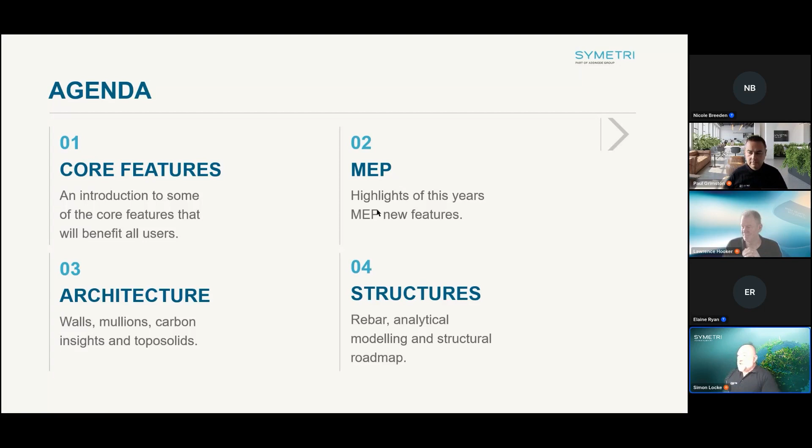In today's agenda, we're going to split it into four areas. We'll look at the core features first, which are hopefully beneficial for every user of Revit. Then we'll take a look at some of the MEP key features this year, followed by architecture with Paul leading that bit, then we'll finish off with structures with Lawrence. I'll be taking us through the first bit, looking at MEP, but first, for those not too familiar with Symetri, we'll go through a brief introduction of who we are and what we do.

Symetri was formed quite a while ago, around about 1989, and it's grown exponentially over the years, mainly through acquisition. We're currently at around 1,000 employees in about 7 countries and 33 offices. Over the years, that size has come from about 23 acquisitions.

Our key catchphrase and the thing we work towards is we challenge people to work smarter for a better future. The four pillars we try to follow: we work with and help people with leading edge, cutting edge technology, both Autodesk and other vendors. We help our customers through our knowledge and expertise, so consultancy, training, etc. And we become a trusted partner through the advice we give, looking at software, training, hardware, etc. Which all ends up with people working smarter, us as well.

The kind of work we do, obviously we work with different people - manufacturers on the MFG side, contractors, designers, consultants, and end clients, owner operators, etc. As mentioned, we work on training, support, consulting, but we also provide IT solutions, so hardware, software, antivirus, design software, etc. And we also have people embedded on long-term project delivery, both BIM consultancy, design work, drafting, etc. Currently we're the number one Autodesk solution provider globally.

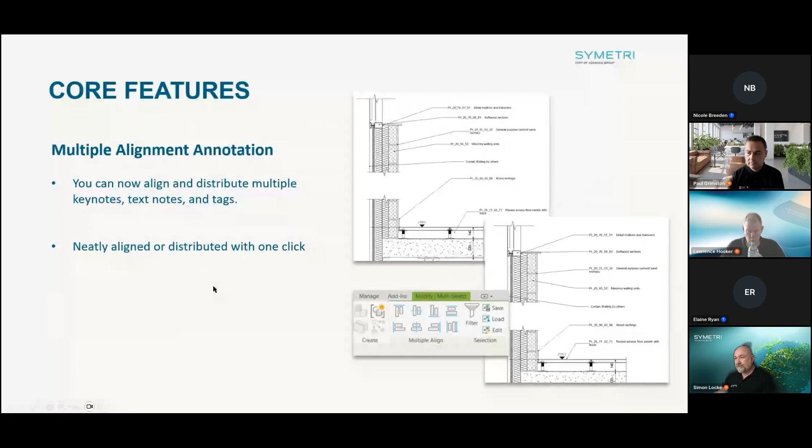The next one's quite a good one, which is, it's not such a visual one unfortunately, but it's background export to PDF. So once you send your PDFs out for export, you can now get an option at the bottom of the dialog box which allows you to export in background, which is then going to allow you to continue working on your project while this is happening, while it's all processing in the background. So it should be a good time saver, that one.

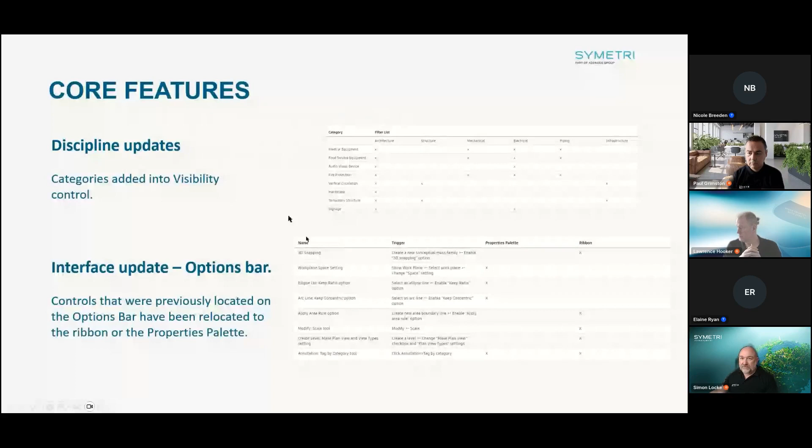The next one, again, is another quite handy one, especially for the management side. This will allow you to create export mapping for IFC. So you can basically save IFC mapping templates out of the project, and you can actually save them within and import them into new projects as well. So it allows you to standardize your IFC mapping. You can give it to other project people and share it amongst the team. So it's a handy feature.

The next one to look at is the import and export ability of step files. So this will allow you to bring in things like 3D manufacturing data from likes of Fusion 360 without having to convert it to DWG, etc. So it allows you to import and export the step file from Revit, so you can coordinate and collaborate better with our partners within the manufacturing space.

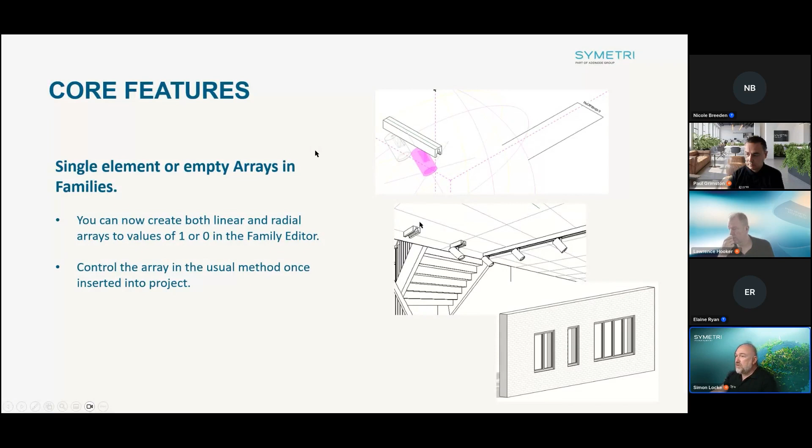So that's some of the highlights of the core features so far. I'm going to move just briefly into the MEP area, which is the area I sort of cover.

So it allows you to then look at your numbering down the line, because quite often you'll delete things, you'll add things in, you move things around, and then the numbering kind of goes out of sync. So it allows you to then consider the numbering a bit later on down the line using something like either manual input, or if you've got an automated numbering system like Navigate or something like that, you can then do the numbering then.

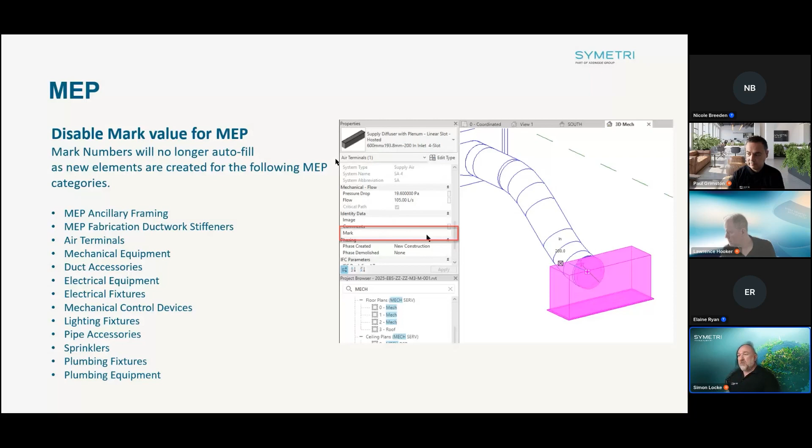The following has added a couple of additional MEP parameters. The first is the maximum amount of circuits for data panels. This has already been available for power panels for quite a while, but now you're able to maximize the value for data panels and fire protection panels, etc. So for things like a data switch, you can set 10 outputs, etc., rather than just having an unlimited amount.

The other one for the fabrication guys is they've added material gauge into there. This will be set within the fabrication database, so it is a read-only parameter, but it will come through now into the properties palette, so you can use it within the Revit project. There might be some more additional ones coming throughout the year.

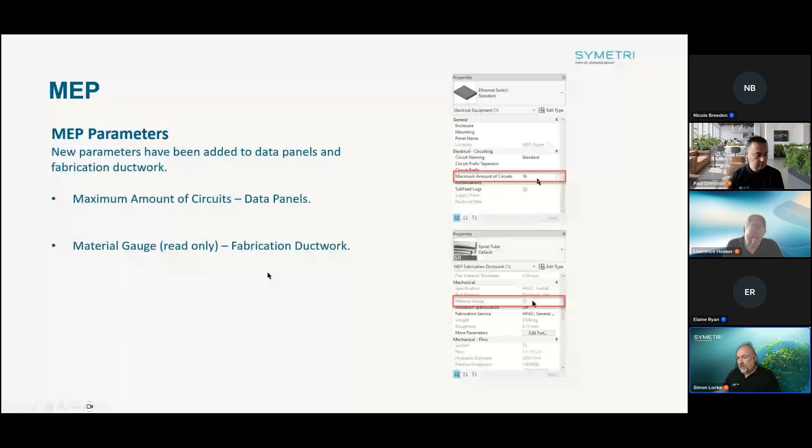The next one is outside of Revit, kind of. The enhancement here is within the fabrication data manager, and this is still in tech preview. But what you can do now is you can actually search for key information. Rather than just filter for things like manufacturer, range and material, etc., you can now search for key information.

So that's enough of the PowerPoints for now. What I'm going to do is flick into Revit itself, and we're just going to look at a few of these key areas that we talked about just there.

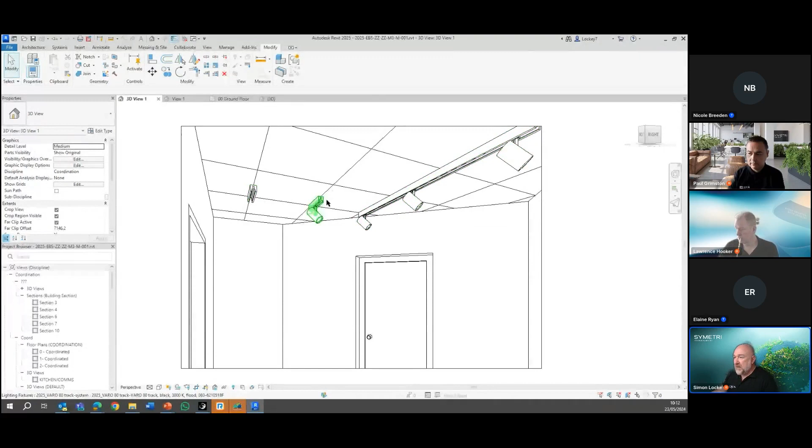So the one I mentioned earlier was the families. This is one of my favorite ones, where you can actually have a 0 or a 1 value within an array. You can see here within the project I've got these track lighting components, one there and one there. This is the same family, just shown in different ways - it's a line-based family. If I look at this one here, the value down here is set to 3. This one here is set to 1, and this one here is set to 0. Again, it's just a case of adjusting that here.

Now you can be a bit smarter with these families. You can have them linked to parameters and make the object wider, so it automatically arrays them a bit more. So you could do all of that sort of stuff, but the main difference is that you can do a 0 and 1.

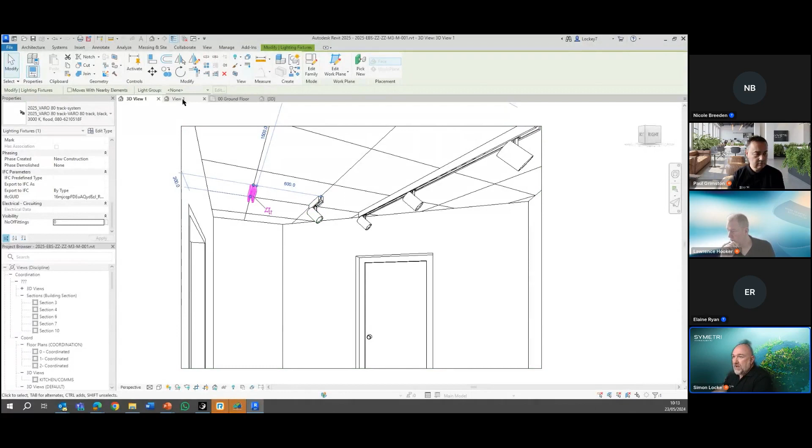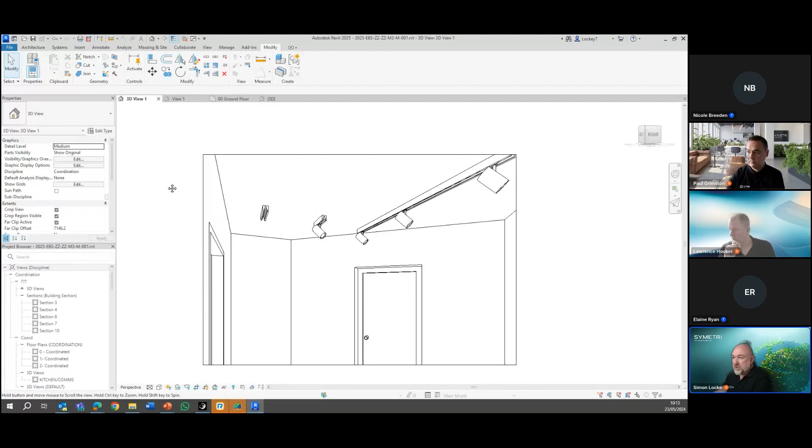Looking at the family, you pretty much put the family together as you would - you create the array, you associate it with the parameter as you would normally, and then again you can see there you've got the array set to 0. Now when it's loaded into the project, this is the sort of end result that you get. So hopefully if you do create families and use arrays within families, you could get some good use out of that.

The next one, I'm just going to switch into a different data set - we can take a look down here at the sheets. You can see there I've got one sheet collection in there called Collection 1. Again, you can delete, you can add these in as and when you want. On the right click there, we've got the option for new sheet collection.

So I just create that one there, and then I can just rename it. I'm going to call this one Mechanical, and then I'll just create another one, and we'll have that one renamed to Electrical. Again, very similar to creating new sheets anyway.

You just right click on the sheet collection, go to new sheet, choose your title block as per usual, and then it adds the sheet in there. As I mentioned earlier, you've got to be careful with this because it will allow you to have duplicate sheet numbers now, so you do have to manage this a little bit carefully.

So again, in here, new sheet, and there we go - again you have the same sheet number there, so you'll just have to be careful with that. If you do want your different sheet numbers to start at different numbers, then you'll just have to manage it from there. Once you've got the sheet collections created, they will appear in all of your plot settings, your PDF output, etc.

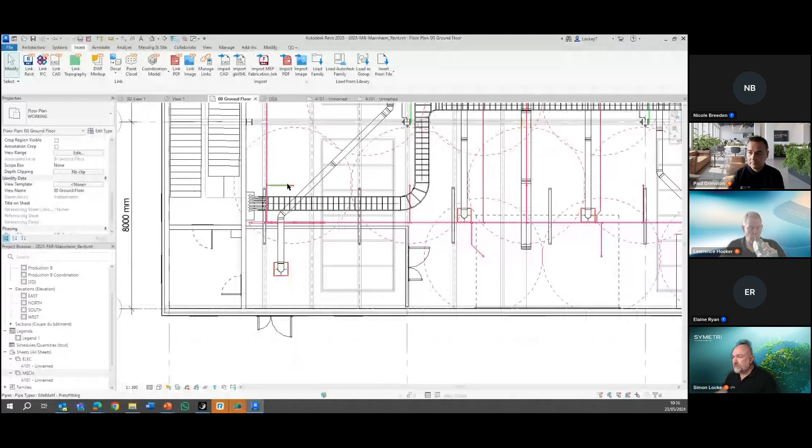So that's an overview of the main core features. There are one or two others, but some of them aren't too visual. But hopefully, it's been useful.

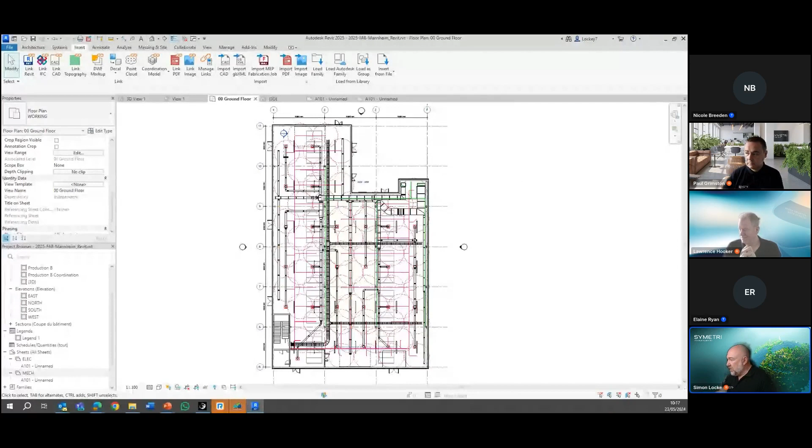So what I'm going to do now is hand over to my colleague, Paul Grimston, who's going to take us on to the next bit. He's going to look at more of the core features, but with an architectural twist. So over to you, Paul. Great, thank you, Simon. I'll share my screen. Hopefully that's all coming through okay.

So on the architecture side of things, there's been a few updates. There's a few things happening to walls. We have the auto join and lock and some wrapping, some options with mullion profiles, some updates to the carbon insight. However, the majority of updates actually are within the toposolids.

Autodesk do group these as part of architecture, even though I think they're probably applicable to quite a few different disciplines. So we'll have a run through some of these. The first bit is the wall options here, so the auto join and lock walls.

So when we create walls, this gives us the option to join them to adjacent walls. And this means that if we have openings, then as they're joined, they will pass through both walls. And then the lock option will lock those so that if one wall moves, the joined wall will also move, which seems like a good idea to have both switched on.

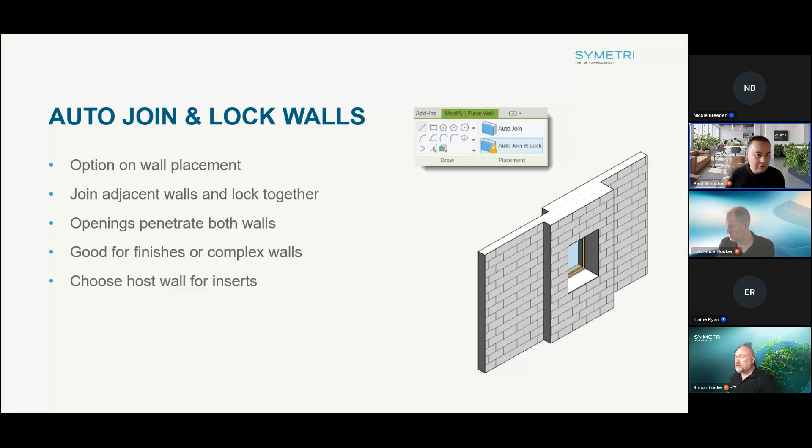And then this is quite a small one, but again, it gives us some extra details. We're able to control the wrapping at the ends of walls. So this is when walls aren't joined, and if the wrapping is already enabled, we can effectively disable it at either end of the wall as we need to.

So what I'll do is jump into Revit and show a few things as we're going through. I'll swap across now. So looking at this plan view, we have some walls here that we might want to line with some finishes. If I click on the wall tool, straight away we can see up on the ribbon we have the auto join and lock options. I'll use the auto join for the moment, and we're just sketching along.

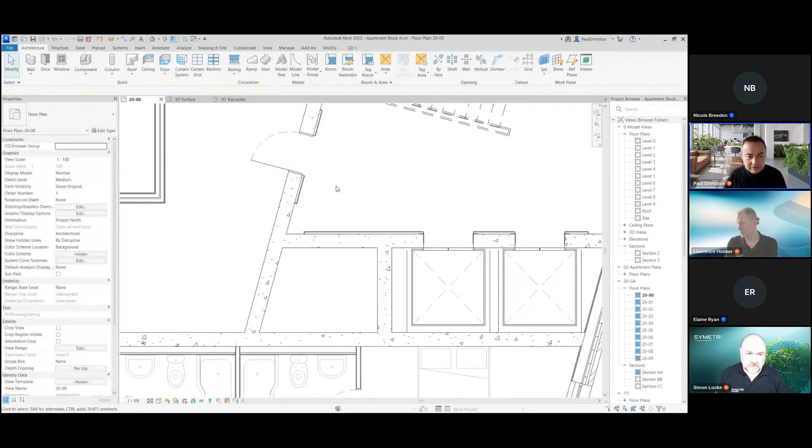Actually, let's make sure we've got the right wall type. Here we go. So we can sketch along the wall here. Once I get the alignment set up, this will work perfectly. Right, so sketching along the wall with the auto join enabled, we can see that it connects to this wall, and any openings within these walls will actually be automatically joined through to that extra wall just here.

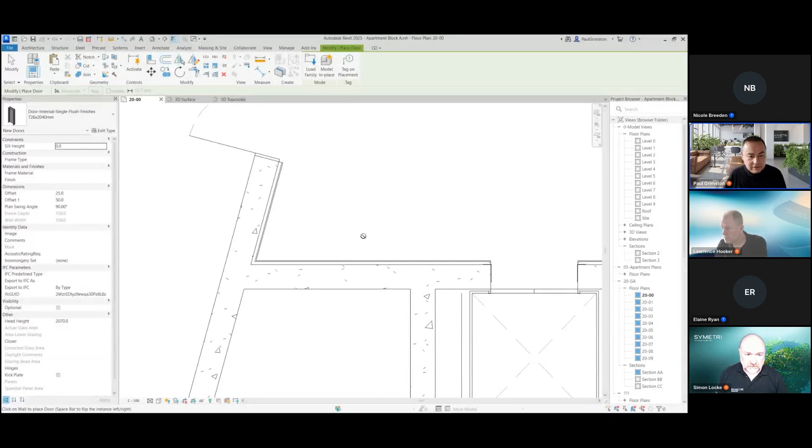So, to do this manually, we would have to draw the wall and then select it and go to modify and start to join, which was a bit time consuming if we've got lots of this to do. One thing to be aware of, we do now need to be aware of the host. So if I do go and place a door in, it could potentially be hosted in the wall that's joined or the main wall. So we will need to be a little bit aware of when we're picking which wall we want to join to.

And what we've got in this one here is we've added some parameters that allow us to extend the door beyond the depth of the wall. And we may need this depending on how we want to deal with the finishes here. So, you know, we may need to have some instance parameters that we can control so that the door sits nicely within those two joined walls.

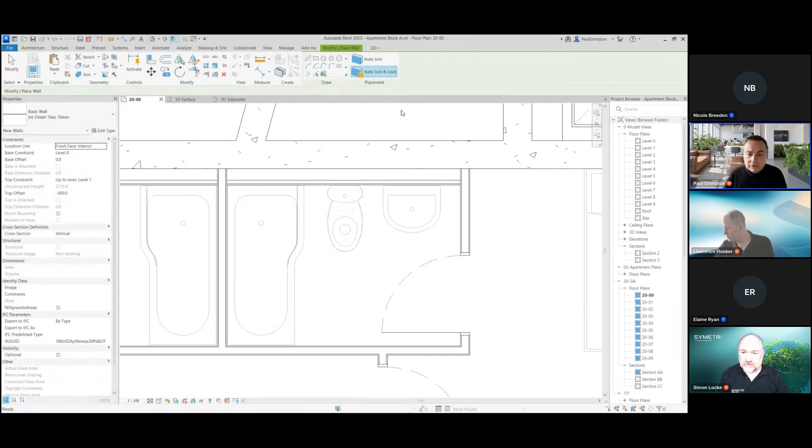And then for the join and lock, again, thinking about finishes, maybe it could be tiling around bathrooms or something like that. So again, if I go back to draw some walls here, we have a tile finish wall here. And this time, if I enable the auto join and lock, we'll swap this just to be a rectangle. Then when we come and draw this wall in and just snap it through to the other side, we can see it's done the join. But it's also now locked.

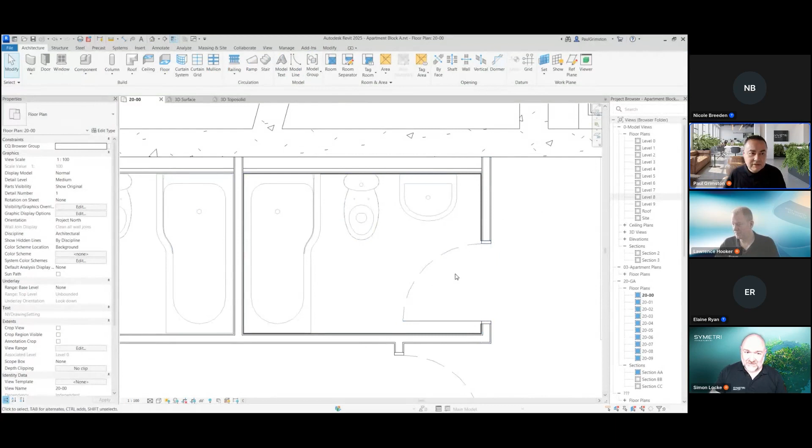So when we're picking on these walls, we can see we've got the lock constraints here. And it just means if I move the main wall, then our finish wall will also move as they're both locked together. And again, if I had to go around lots of bathrooms and draw these walls in and join and lock them, then that's going to be quite a time-consuming task. So being able to do that as I create them, I think is actually quite a good improvement.

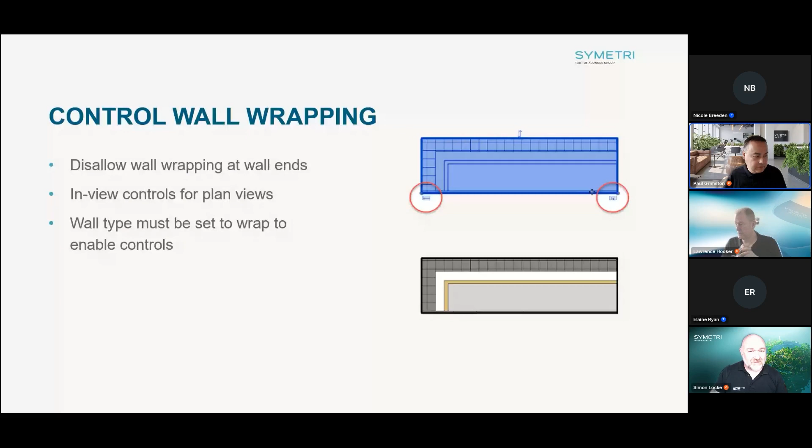Right, swapping back to the presentation. So one of the other new features, we won't actually show this one, but really just to discuss it, it's mullions, so the profile families that are used for mullions in curtain walls. They can now have multiple loops in them. So previously it was just one single loop, which meant you had one outline and your mullions were always solid objects when you cut them in section. Whereas now with multiple loops, we can create them as hollow objects by putting two loops, one inside the other. And we can also create separate shapes if we needed to.

So I think that, again, can be useful, especially when it comes to doing some of the detailed drawing. However, usual warnings apply. Please don't overdo it. Don't put too much detail in, as it can slow your models down. So look at using detail components within the profile to add that detail.

The next one's a very small update to the material browser. We're able now to select multiple materials and delete or add those to libraries. So instead of doing those one at a time, we can speed that process up. And we've also got a new quick thumbnail generator. So if you do have lots and lots of materials in a project, it can be quite slow in the material browser. When it starts trying to generate all of those thumbnails for you, it can slow it down quite a bit. So enabling this new quick thumbnail generator will speed that process up. So again, it's just a nice one to help make bigger projects a little bit quicker.

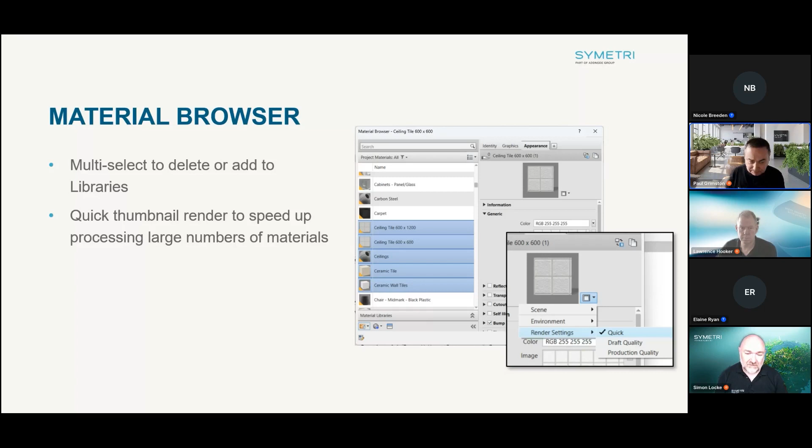So this one, strictly speaking, it's not really in Revit, but it's kind of been released alongside the Revit 25 version. So I don't know if everyone's seen, but on the Insight settings, there is a carbon analysis tool. So it's built into Revit on the analysis ribbon menu here. You can go and send the model off for the embodied carbon analysis. Autodesk are really developing this. It's got some nice reporting on here. We've got some more flexible dashboards that are allowing us to do good comparisons and things.

Personally, I'm always slightly disappointed because the material EPDs are sourced from the EC3 database, which is a little bit biased towards North America. So it's quite good for, I think, comparison and early stage.

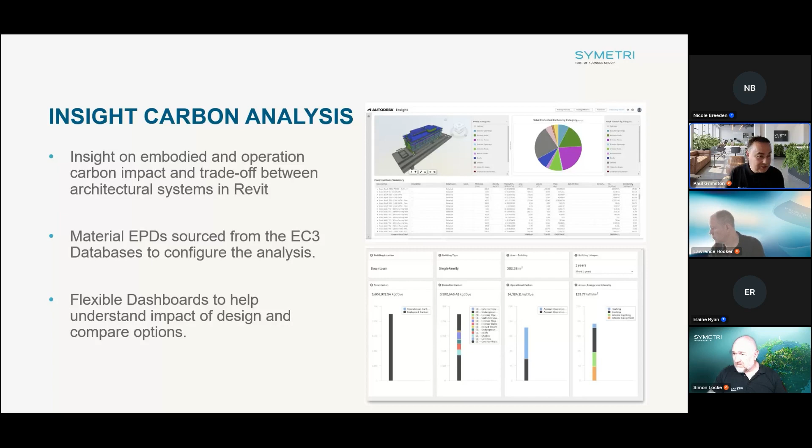And then probably the biggest, from the architectural point of view, the biggest changes have been to the topo solids. And they were introduced in 24, so it is an ongoing process. On the public roadmap, Autodesk have stated that they do want to vastly improve the site modeling tools within Revit, and this is the sort of second step for that. And they are starting to get there with this one. It has made a good improvement over what was introduced in 24.

So the first bit there, we can see that when we do convert the old topo surface into a topo solid, the building pads are now supported. So that's a welcome thing, because we had numerous comments that in upgrading to 24, the building pads disappeared and everything stopped working. But this has coincided with the new excavation tool that allows us to create a similar kind of building pad functionality inside 25 now, using things like floors or roofs or other topo solids. So we'll show through those.

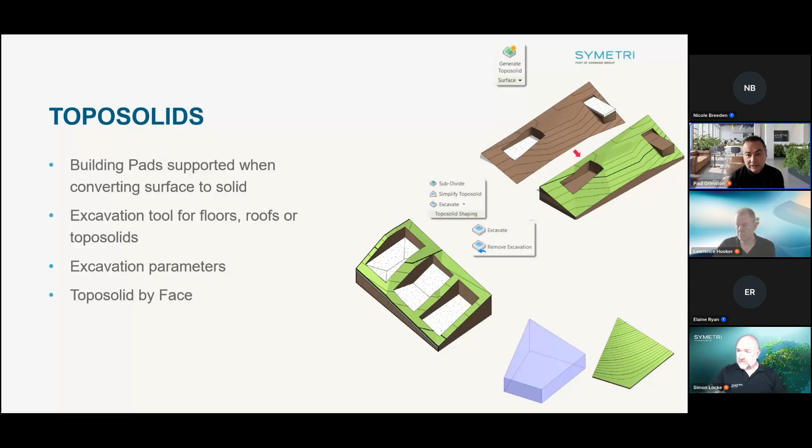We have some excavation parameters that go along with that, and we can also create topo solids now based on mass objects, topo solid by face. So in the same way we've been able to do that with floors, walls, roofs for some time, we can now do that with topo solids as well. So there's some definite improvements here.

There's a few more. So cut faces. The functionality in 24 was that we were able to cut from the topo solid using other objects. Those cut faces now will act as a host to objects such as railings or trees, plants, planting, that sort of thing. We've got some editing updates, so we can see the contours whilst we're editing. So that gives you better feedback as you're manipulating the surface to see what's happening to the actual contouring. And there's a smooth shading option, which is, again, a welcome addition there, because they always look a bit triangulated when you see them in there.

And finally, and this one is one of my favorite ones actually, is the shape editing snaps that are allowing us to snap to other objects as we're adding points and split lines into that. Actually, there's one more, isn't there, which is the shaft. The default behavior if you have a shaft that cuts through an object is if it touches it in any way, it cuts right through the object. So specifically for topo solids now, it will only cut as far as the shaft sits into the topo solid. So again, it acts more like an excavation actually. So again, I would probably be doing this with the new excavation tool, but we'll see some of these ones working. So let me swap back to Revit, and we've got our 3D surface model just here.

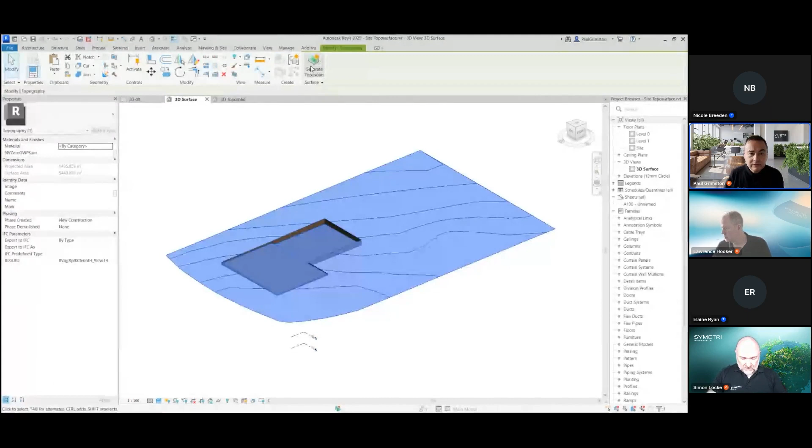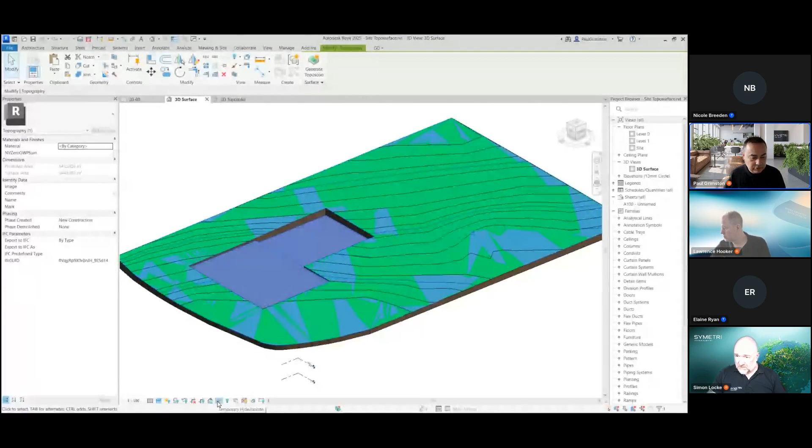So this is one that's been upgraded from 2023. It has some building pads in here. So if I select one of those, we can see we've still got the pad category, which are still editable actually, and we can adjust their heights whilst they're in here. But the standard process, so if I select the surface now and generate the topo solid from that surface, we'll just choose this grassland one, then the building pads kind of remain, and they are actually cut from the solid as well. It's a little bit difficult to see, obviously, because we've got both the surface and the solid there at the moment. So I should be able to select just that surface. And if I just do a temporary hide on this so we can see it, then we can see that the topo solid is now cut in the same way as the surface would have been.

However, the slight downside is we have to keep the surface, because unfortunately the building pads are hosted by the surface. And if we delete the surface, the building pads will get deleted. So it may be that we need to change its phase, set it to existing, and make it so that we can't see the surface. That was probably a good way of doing that. But if I do delete it, we'll see that that actually comes back and we get the full solid there. So what we can do is use floors to do a similar functionality. So I've actually got some created in this model here. So I'll just unhide those.

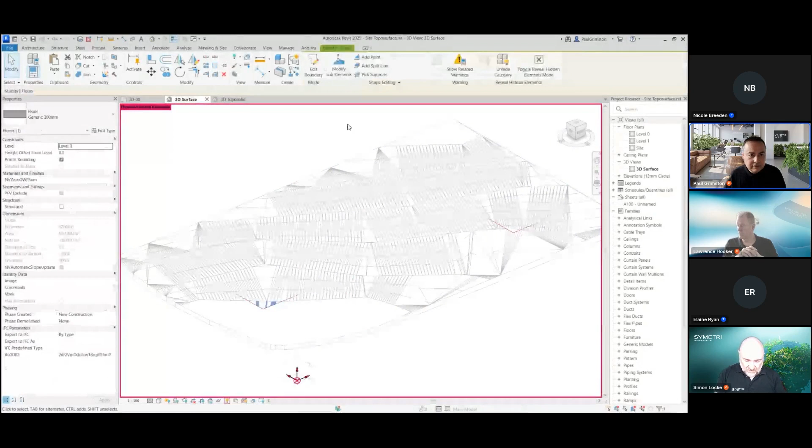And picking on the topo solid now, we have this extra excavate tool. So when I select this, I can now come and choose the floors that are in the model just here. And we can see now that they start to act like the building pad. So it's just cutting through.

So in 24, we didn't have excavate. We'd have needed to use the cut tool, but that would not have actually projected that up through the top of the solid. It would have literally just cut the volume out. So the excavate is now kind of replicating the building pad tool. Okay, so I think it's really good.

Obviously, if you move the level of the floors up and down, or so I'm doing this with floors, we could do it with other topo solids. We could do it with roofs as well if we needed to. But we can sort of manipulate those. And it works also if we have shape edited the floors or the topo solids or even the roofs.

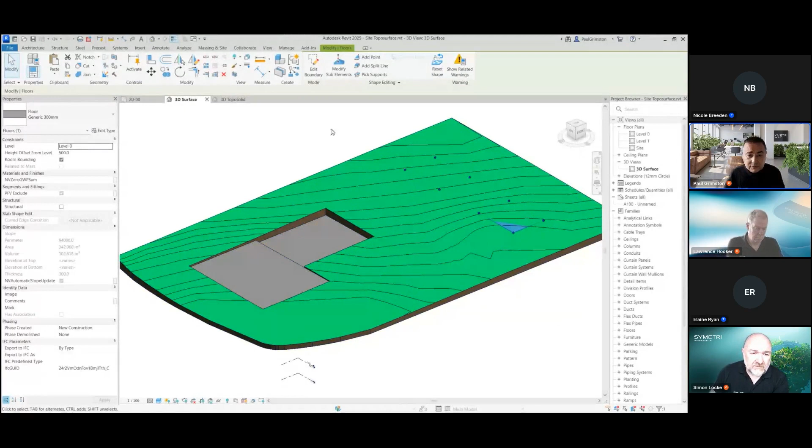So I've got this one just here, and I've set it to be a little bit of a ramp, which if I now excavate that, we can see that that works. And that's also sort of sloping up the contours there as well. So we've still got that same kind of excavation, but it gives us a bit more flexibility to create things like paths and ramps and stuff in there.

Whilst we're talking about these ones, we do have the new excavation parameters in here. So picking the topo solid, I can see I've got total excavation volume from these 3 floors, and then we can view them individually to see how much material they're actually taking out of that topo solid.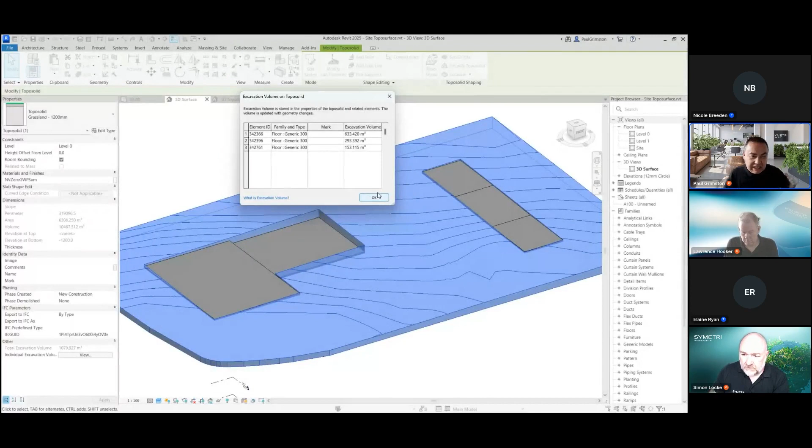And then these are in addition to the usual cut and fill parameters, which obviously we need to have an existing topo solid to get the cut and fill parameters in here. So I think that those are pretty good improvements. Some of the other bits that we're going to have a quick look at.

So I'll cut through, I've got another model opened up to show how this one works. So this is a slightly bigger solid in here, and looking in, we can see it's quite triangulated. Doesn't look very smooth at all. So let's get this in the right place. So on the Massing and Site tab now, under Model Site, we can have the smooth shading option enabled.

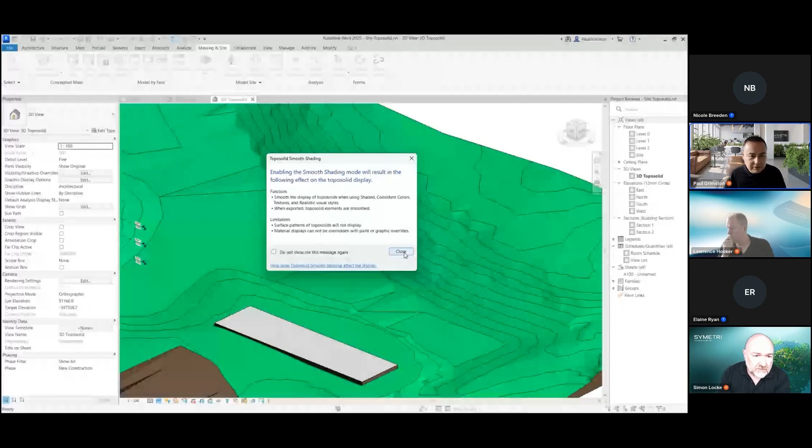There are some limitations, such as some of the decals don't work, and there's a few things like overriding materials with paint. So I'm not quite sure how it's working in the background, but it does actually smooth out the shading, and it doesn't really slow down viewport performance. And it just gives us a much nicer view of our topo solids and our contours in there. So that's kind of one nice one that's good to have switched on.

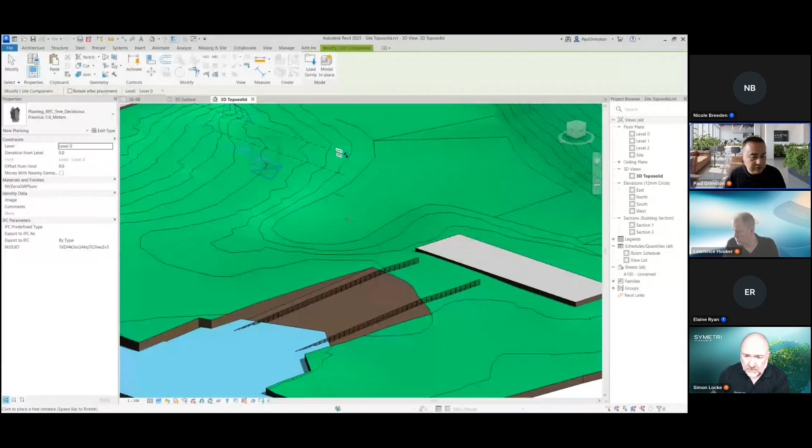The host faces that we've got in here, so we've got this topo solid cut by a mass object, so I can enable that so we can see the object that's actually cutting the slice down. And now with these railings, if I select them, I can just pick a new host and pick on my topo solid, and it will follow that cut face now. So we can do that quite easily, and equally if we come and add a site component, it will also pick up on the cut face as we add those in. So that's kind of a welcome change for us.

When it comes to the editing, so firstly, if I come along here and we start to add in sort of points and split lines and things, it can be a little bit difficult to see, but we can see the contours are still visible. So as those points are added in, the contours will change, and we can kind of see the effect pretty quickly that those points are having.

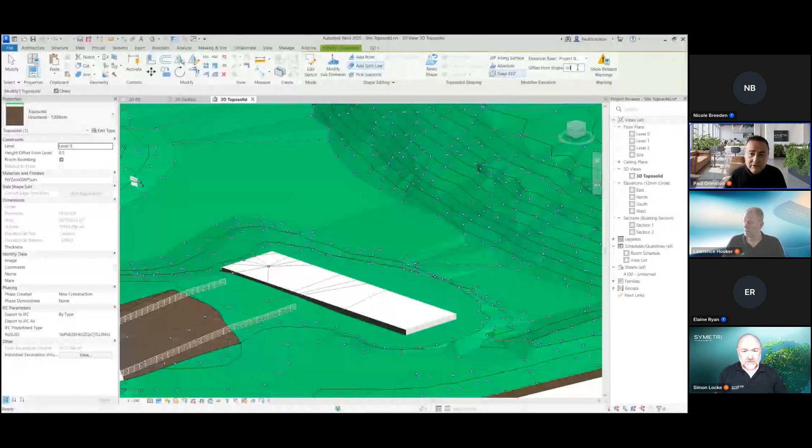But probably one of my favorite ones here is actually this new snap, where we've got the snap to object. So when we're adding points or split lines in here, we've got snap to objects effectively to the XYZ value. And this does actually work with an offset. So I could put a little -50 offset in here, say, and then come and add some split lines around the object that we've got drawn in here. And it will run through and adjust those points.

And it's kind of a nice way of being able to shape your solid around other objects so that we can get that split lines and, you know, get it drawn around that object. And it's making the regrading, if we're trying to put in roads or paths and things and trying to match the solid into that, a much easier way of working.

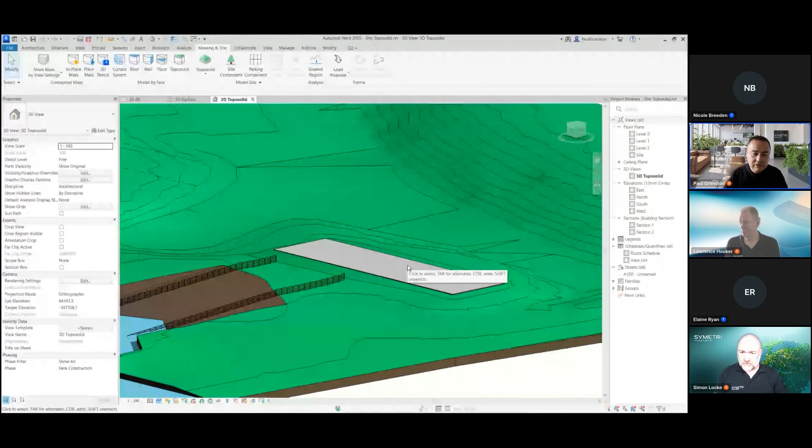Obviously then we can use the excavation tool to actually cut that overlapping bit out with that object still, and then we'll get a much better section as we cut through those two topo solids in there. So that's a quick run through of the architectural updates there.

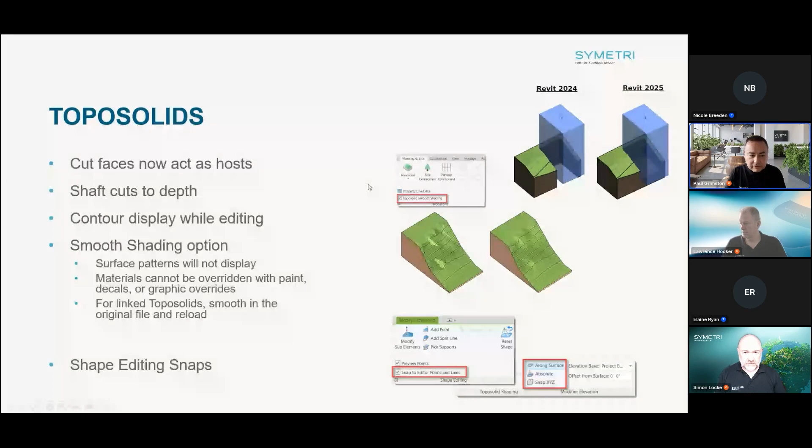So at this point, I think I'm going to hand over to Lawrence. Yeah, thanks very much, Paul. I'll just start to share my screen. Okay, I'll disable mine. Hopefully that's coming through. I can see it is.

So yeah, we're going to take a look at some of the new structural features. In particular, as in lots of previous releases, we have some really significant updates to rebar splicing. We're also going to look at the method now of freezing rebar, which is disabling the reinforcement constraints. We'll look at some additional detailing tools for rebar. Then we'll go into the continued improvement of analytical modeling. And finally, I'm going to finish up with the Autodesk structural roadmap so you can see the direction of travel in the future. Let's begin with the rebar splicing.

Okay, so this has been missing for quite a while now inside Revit. And what I really like with this implementation is that the rebar splicing is parametric. So that means if we change the diameter of the reinforcement bar or we change the length of the reinforcement bar, that splice or lap will update.

So looking into the settings here, you can see on the context tab, we can either just pick lines, or we can do it by stock length, which is the option that's currently displayed. So we have a maximum bar length and a minimum bar length. And then we have something called the runout, which determines whether the lapping starts at the start of the rebar sets or at the end of the rebar sets. We can obviously toggle that as well, which I'll show you in the software itself.

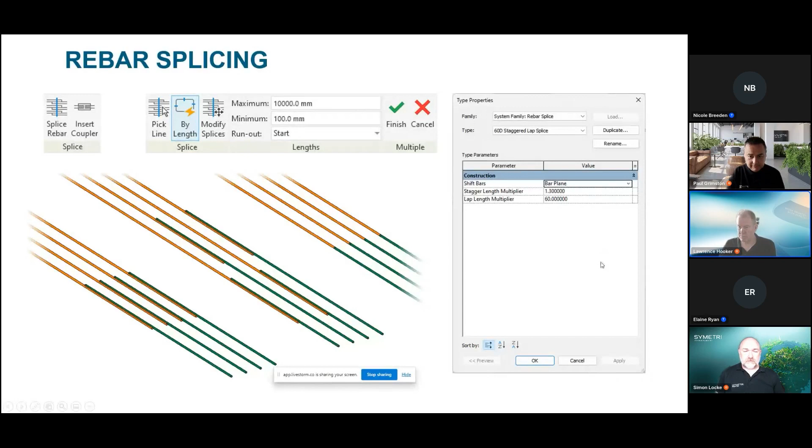And as you know, with the view filters, you can switch off and on those bars as well. So you could hide all the bars that are at stock length or below stock length, and then just leave the bars that are over stock length, and then we can use our new lapping tools to go ahead and update some of those things. So what I'm going to do here is just switch backwards and forwards between the softwares here.

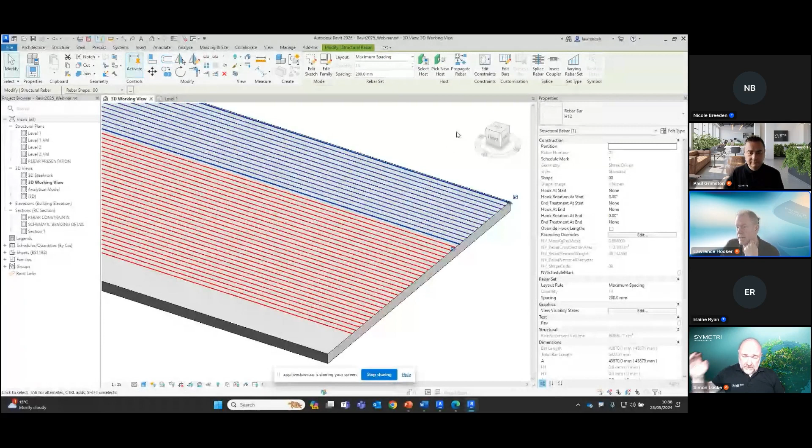So now we're inside Revit, and what we're going to do here is look at that splicing tool first. Now, you can see here I've already got a filter active, so I can see that all these bars are over stock length because they're shown in red in this case. So what we can do here is go ahead and select a rebar set. And looking up onto the context tab, you can now see that we have splice rebar. If I select the splice rebar tool, we can see on the context tab we now have three options: pick line, by length, or modify splices.

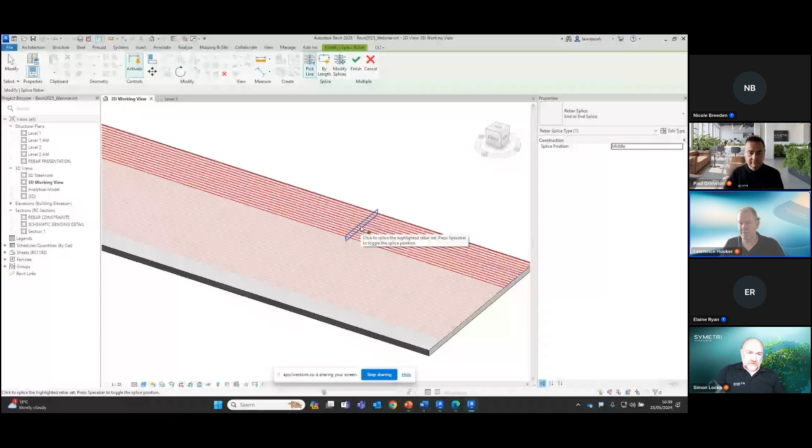So if I'm in the pick line, you can see that this is a manual intervention, and I can just move my cursor along here. Notice I get a temporary dimension. I can type data in there if I want to for a specific length of rebar, or I can go to by length.

Now here, just hovering over the rebar set, Revit shows me where those splices or laps are going to be applied. Notice on the context tab at the top we have the run out set to start. If I press the space bar, we can now toggle that. The space bar is a very handy way of flipping between those runouts.

Looking into the properties palette, we've got an end-to-end splice, which would be ideal if we were using couplers. In this case, I'm just going to have a staggered lap splice that I've already configured. I'll use the space bar here and left click to apply those laps. Looking into the model now, you can clearly see the lap has been applied, and the bars are laterally offset so they're not clashing, which is a really nice thing.

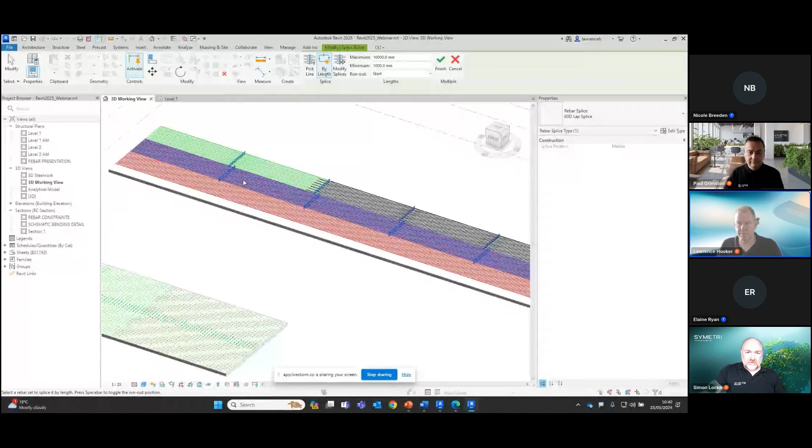And you can see it's gone through and done that for each of those sets. Let's use a slightly different technique. So what I'm going to do is just now have a 60D lap splice without the stagger. Again, I can press the space bar to adjust the runouts, or here what I'm going to do is just pick the lines, and we can pick the lines however we want to actually splice that.

So let's say I wanted a splice over here and I wanted that to be 2 meters in there. I can just type that in, and you can see that lap has now been created with the lateral offsets there with exactly 2 meters.

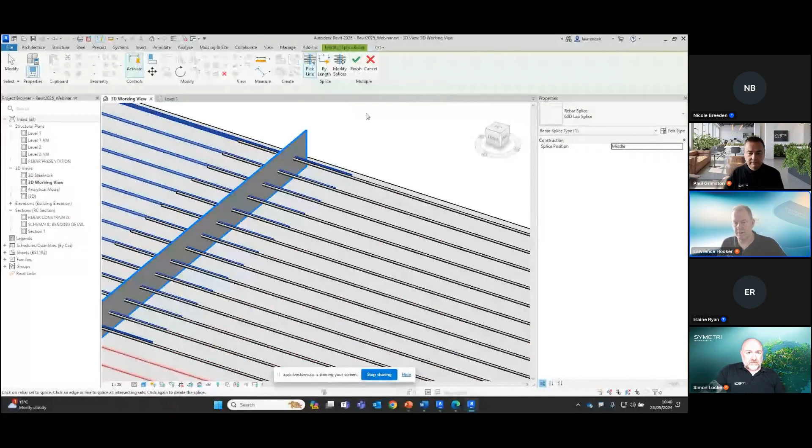Now, like I've said, these are parametric. So if I go back and select these 2 rebars that we've already spliced here, currently these are H12s, which are 12 diameter bars. If I come through and increase these to H25s, we'll notice that the lap has got longer, of course. So you can see they're adaptive and have good parametrics controlling those laps.

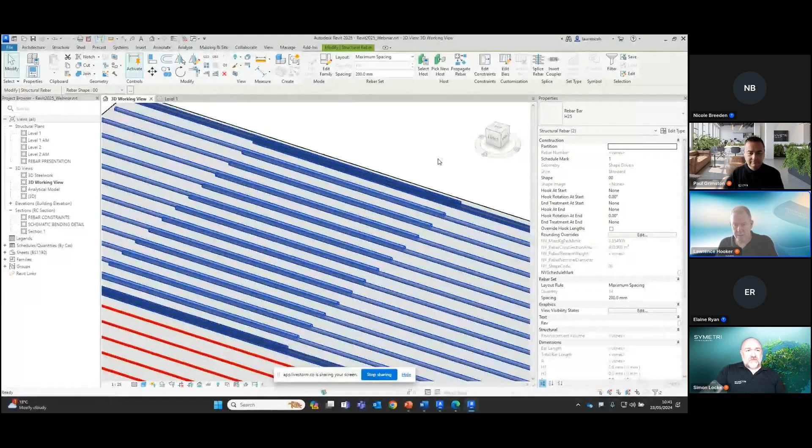Another thing we can do, if I switch into a plan view here, you can see I've got this reference plane drawn at a bit of an angle. What I can do is go back and adjust any of these laps I've already made. So I can go into here and modify the rebar splices, pick a splice position and manually move that, or type in dimensions, or use move and so on to adjust that.

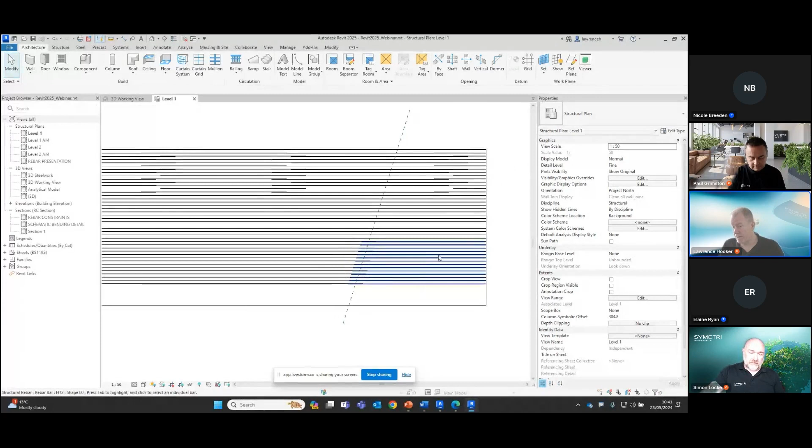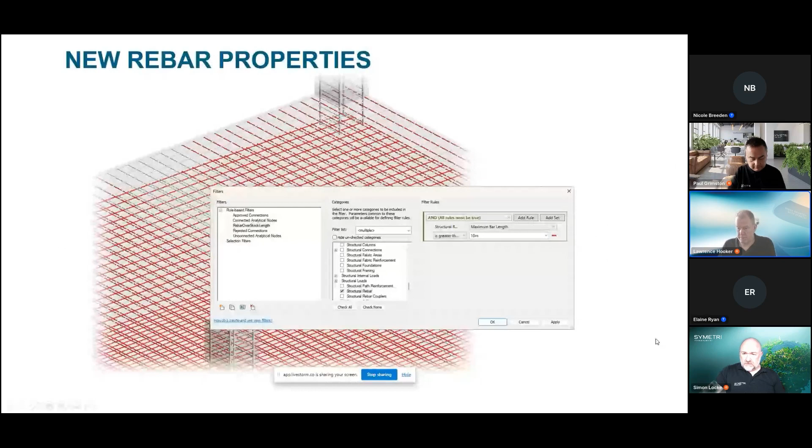Or another option we've got is I can pick these rebars here, go back into my splice rebar option, and where we've got pick lines, I can actually pick a reference plane or a beam or any other structural component to produce that lap. You can now see we've effectively ended up with variable rebar here, because now we've got that lap at that angle. Let's switch back into the presentation and go through to the next part.

So here we're going to look at another really useful tool called Rebar Constraints. You've probably all had situations where you've changed some formwork within the model, or changed some reinforcement conditions, and then you get unexpected updates for other rebar. We have parametric rebar, and we've had parametric rebar since it was implemented in Revit. Generally that's a good thing, but it can work against you in certain situations.

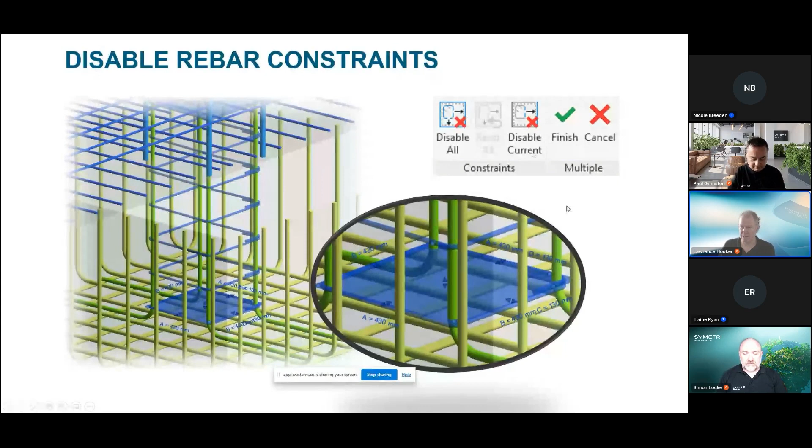So we now have the ability to disable all rebar constraints within our selected shape, or we can disable the current constraint that we happen to have selected. We also have a special property we can view as well. If we have disabled rebar constraints, obviously they will not update. So we can create a filter rule and say show me all of the rebars that are currently disabled, in red. So we have a good visual indication of what is going to update parametrically and what will need a manual update. We'll go through and take a look at that in the software itself.

So to do this, I'm just going to switch into our 3D view over here. Okay, and just looking in here, you can see that I have this 3D pad foundation over here.

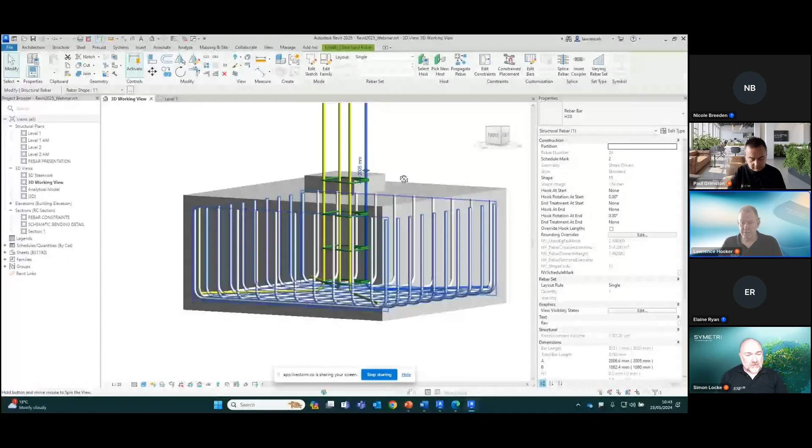So I have some starter bars coming up. Now, the starter bars are obviously going to lap into the column, and you can currently see I have these links that are going to contain those starter bars. Now, these ones aren't actually on cover, because they're obviously inboard of that column. So what I might want to do here is disable those rebar constraints.

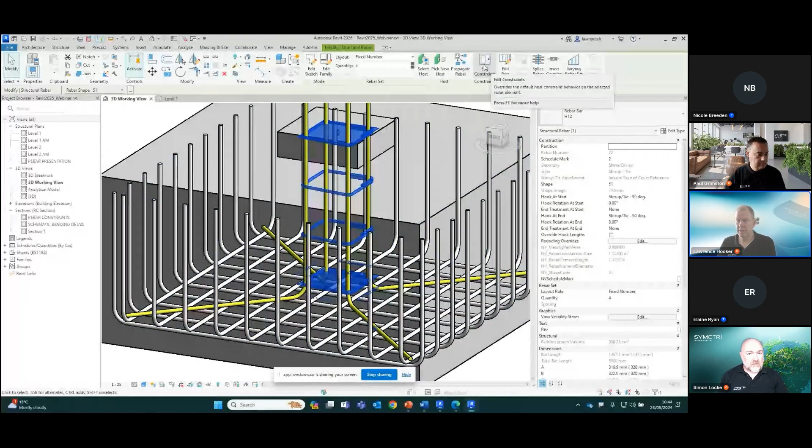So I can select those links, and you'll notice we have our normal edit constraints tool, as we normally do. If I select this now, you can clearly see here that we can disable all constraints on this, or I can disable the current constraint that I might have actually picked. So if I pick this one over here, you can see I can just disable that current face.

Now, to show you that in a little bit more context, what we'll do is we'll just open up a sectional view. You can see I've got two beams here, and you can see I've got this second link lapping in with the main links over there. This already has its rebar constraints disabled.

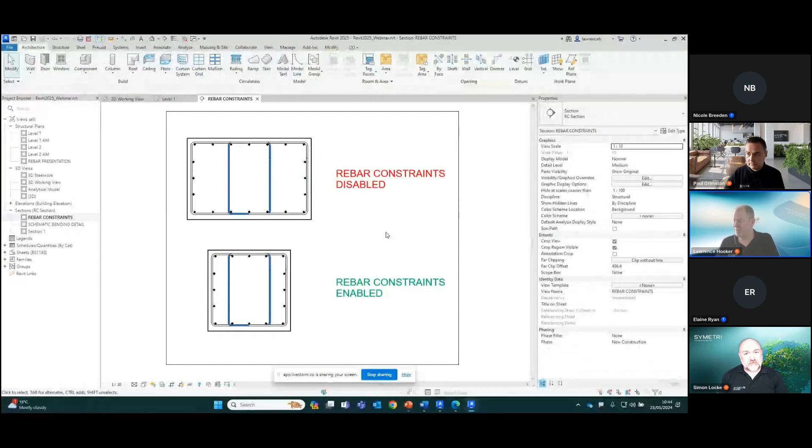So if I select the formwork here, or the beam, and I now increase the size of that, we can see that link is quite happily positioned there, and it will stay there and not react to the parametric change. Of course, this one has the rebar constraints enabled. So now, if I go and change the section size here, you can then see that the link will follow that. So again, you've now got that choice, whether you have these update or not.

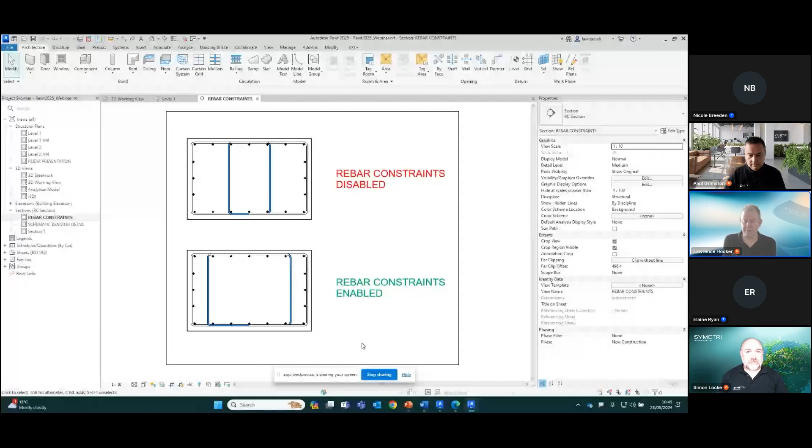Okay. So let's now look at some detailing for reinforcement as well.

So we have a nice new update here for schematic bending details. So bending details were launched in a previous release, and in this release we're extending that a little bit further on with these schematic bending details.

What these basically do is allow us to tag the bar in the normal way. It will obviously bring out the normal rebar tag, so here I'm just showing bar marks, but then we can actually tack on, if you like, these bending details that we have. Now, because we want these to actually be able to fit within the tag itself, this is why they're schematic, so they're not necessarily to scale.

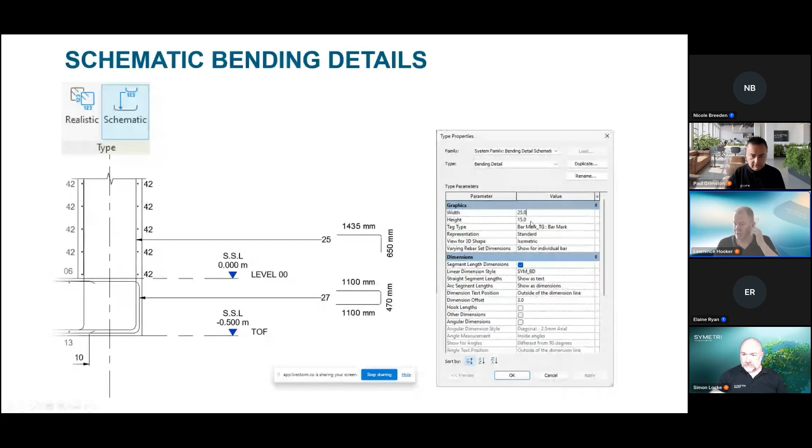And you'll notice in the type properties dialog, we can set the width and height of these schematic details, as well as all of the other configurations for dimensions and so on.

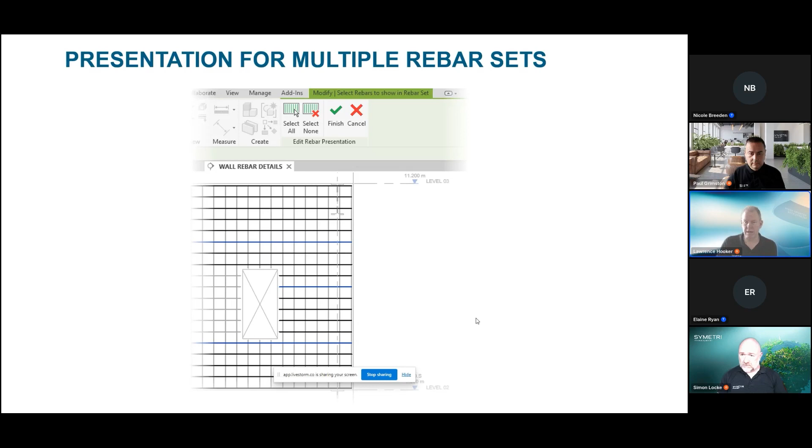In the same sort of vein here for producing drawings, we've now got presentation for multiple rebar sets. So again, this is quite significant. So what this enables us to do now is be able to actually control the presentation on multiple selection sets. So for example, I can just go and pick several rebars concurrently, hit finish, and then I'll have my presentation ready to start detailing.

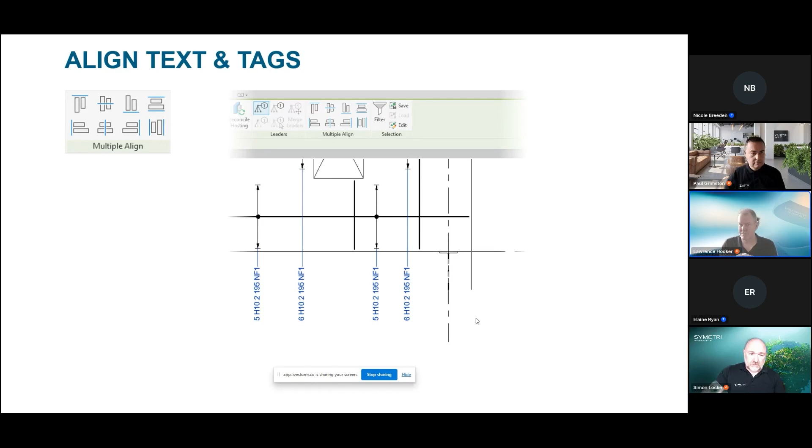And I think Simon mentioned this on his presentation to start us off, that we've now got align text and tags within 2025. Now, this is very significant for rebar detailing because clearly here you can see that I have some multi-rebar annotations that I've already placed out in plan. And of course, I want these to all be aligned. And that's a great use case for this align text and tags tool that we've now got.

Okay, so let's now take a look at these in the software themselves. So I'll just switch back into Revit here. And we'll just close down the rebar constraints view over there. And what we'll do is we'll start to look at some schematic bending details.

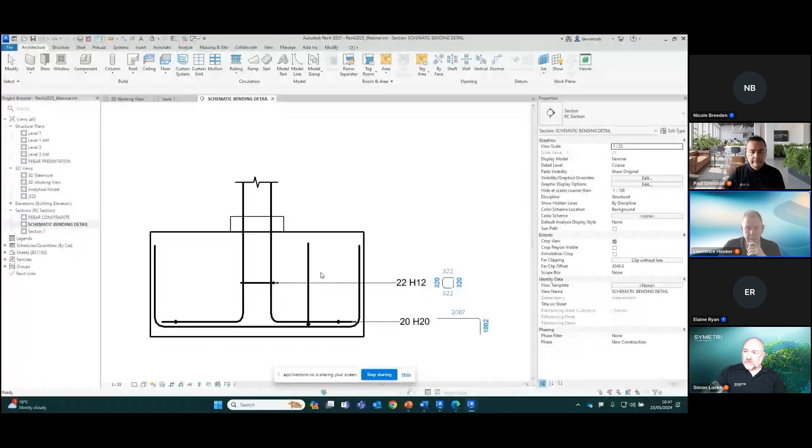So in here, you can see that I have a cross-section through the model at the minute. I've already got a couple of bending details added in. And I'm just going to now add a new one in to this. So there's a number of ways to actually launch the tool. I can pick the rebar first, and I can go up on the context tab and I can select bending detail.

Or, of course, I can go back and select the tool first and then the rebar itself. So here you can see we actually have a real bending detail, not a schematic one. Looking up at the context tab, you can see currently we have realistic.

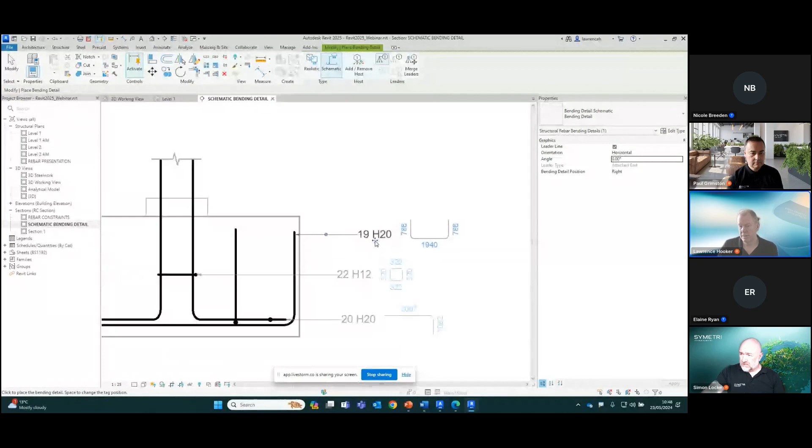But if I switch to schematic, which is our new tool, you'll see we get a more traditional type of call-off. I've got a tag here, currently calling up the number of bars and the diameter, and now I have that schematic bending detail on my cursor. I can just place it down where I want, and that schematic bending detail is created.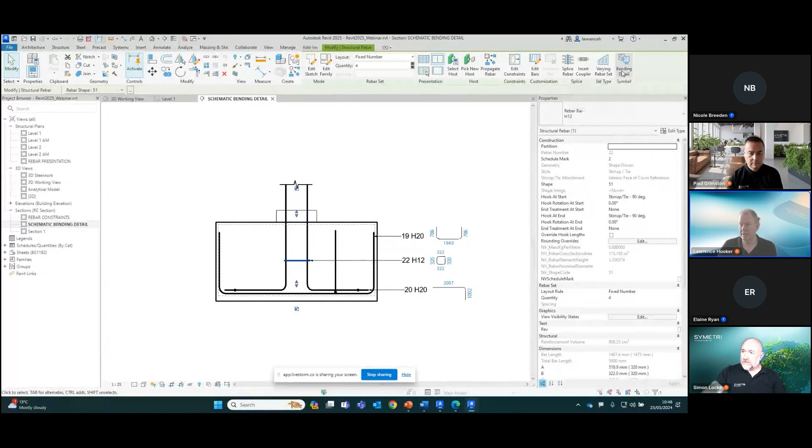Now, moving on a little further, I'm also going to do a real bending detail on the link over here. I've selected the link, and I'll come up and choose the bending detail tool again. This time we want to make sure we have a realistic detail. If I place this one down here, this is what we would have seen in previous releases.

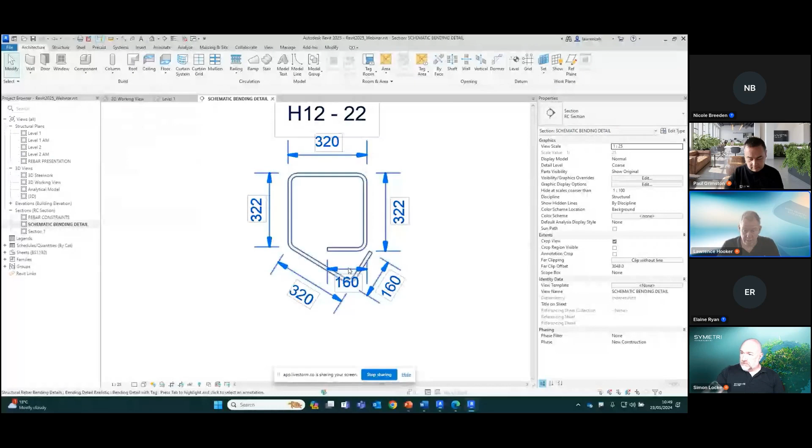You can see we've got a lot of congestion around the annotations here, and previously we couldn't really do much about this. So what I can now do is hover over this 160 dimension, press the tab key to cycle between the tools, and move this one out of the way. I can do that for all of those annotations, not just in the real bending details, but also in the schematic bending details we talked about earlier. That's a huge improvement for drawing legibility.

Okay, so we'll also look at rebar presentation here. I'm just going to close this view down and open up our rebar presentation view. In here, you can see we have quite a few different rebar sets within this slab.

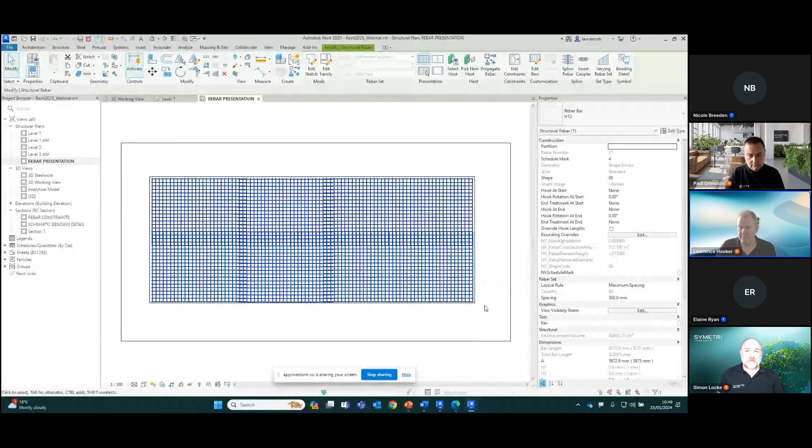Now my first task here will be to select all of the rebars in here, so we'll select all the rebars in the host. What we're going to do is go into select rebars in rebar set over here. I'll select none, and I can now come through and actually start to select the various rebars.

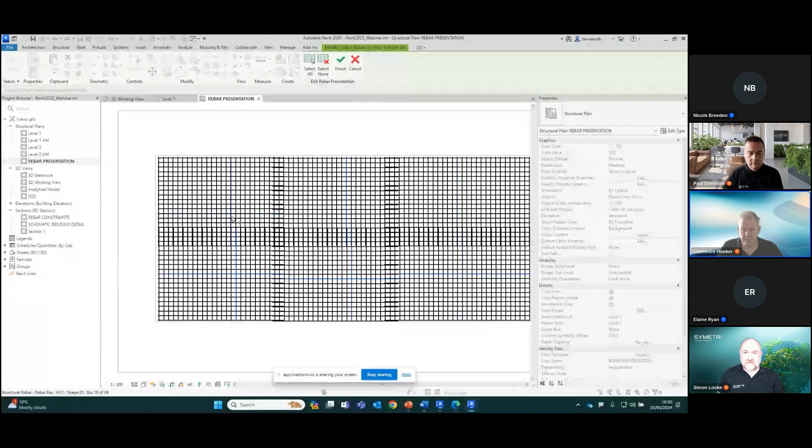So I'm going to select all of these, and continue over here as well. We'll go ahead and select some of these other rebars over here. This is really quite useful. You can see I've got all of those set, and I can just go ahead and pick finish. Now you can see in one fell swoop we've been able to present all of those rebars, which is very, very useful.

Now, while we're here, we'll also start to tag these up. I'll go to the Annotate tab, and here we're going to use our multi-rebar annotations. We have a nice new feature here which will allow us to not have to pick positions. So let's now start to detail some of these.

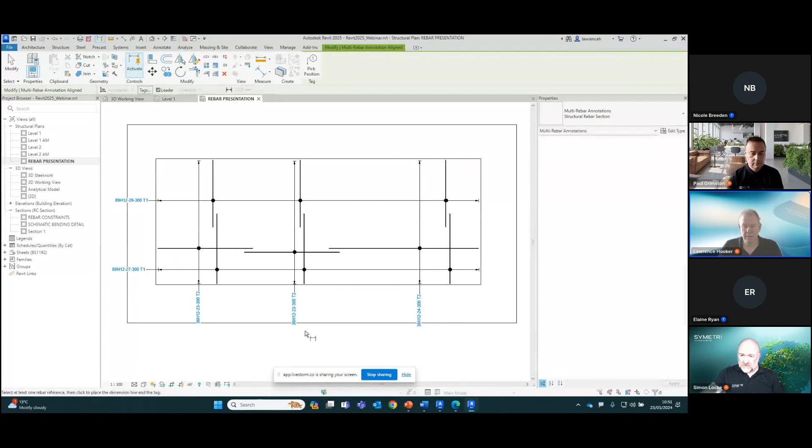So we'll go through and pick these out as we need, and then pick the ones over here as well. We'll just get those picked out like so. Doing this, obviously, is really fast and efficient, but I might not necessarily get all of these in alignment.

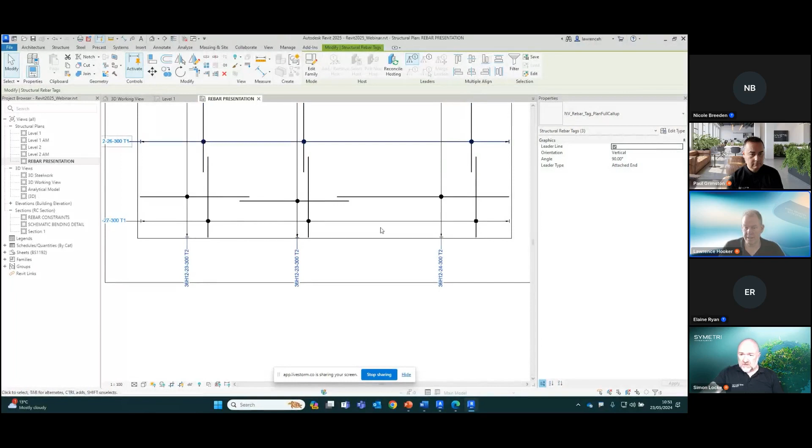So I'm going to select all of the MRAs, and pick just the tags over here. Now, as Simon already has shown you, we've got multi-align. I'm going to now align these perhaps to the bottom over here, and now I've got that perfect alignment with all of those MRAs. So massive improvement there.

Okay, so let's now finish up with the analytical modeling over here. We're going to look at some of these new workflows. Going back to 2023, we introduced standalone analytical models, so the analytical model is no longer automatically generated as we create our physical structure. This allows engineers to get involved in Revit at an earlier stage and start to design the model before we think about the physical elements.

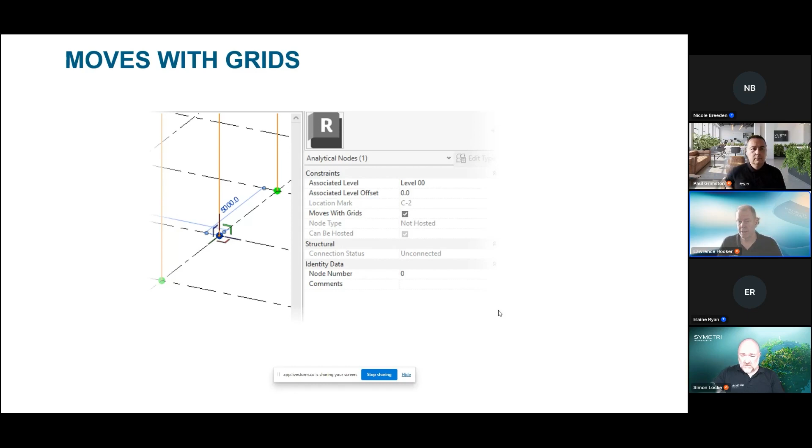Now, to expedite this workflow, we can now constrain the analytical elements to grids, so if I start to move and change the grid, the analytical model will flex and update. We've also got some tighter integration with Robot now. Something you really need to be aware of: if you are currently using Robot Structural Analysis Professional, you must install the integration separately. This was always installed automatically when we installed Revit and Robot, but you've now got to do that as a manual intervention.

That becomes more significant when you start to put loads on, because obviously the loads will be generally aligned and normal to the local coordinate systems. So it's great to have consistency between the two tools.

Okay, so let's now again flip across into Revit, and we'll start to have a look at some of those analytical modeling changes. So we'll just close down our presentation view over there, and we'll just switch into the analytical model in here. I'm going to begin by showing us some of the new tools we've got for the panels.

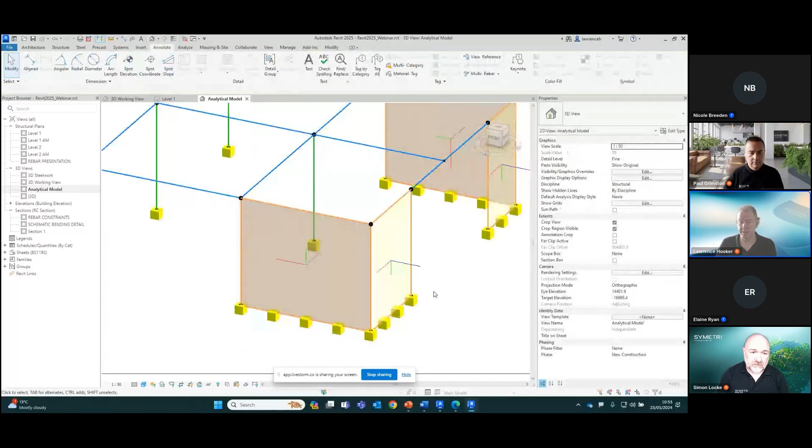So I'll select a panel over here, and looking up onto the context ribbon up here in the context tab, you can see I can now align the x-axis and flip the z-axis. So notice here, as I select this, I can see that local coordinate system now flipping and changing. So that's a really good update there.

Let's also now open up a plan view in here. So you can now see I have the analytical modeling plan. And what I'm going to do is just tile these views so you can see these reacting and updating accordingly. So we'll just tile both of these so we can see the plan and the 3D model.

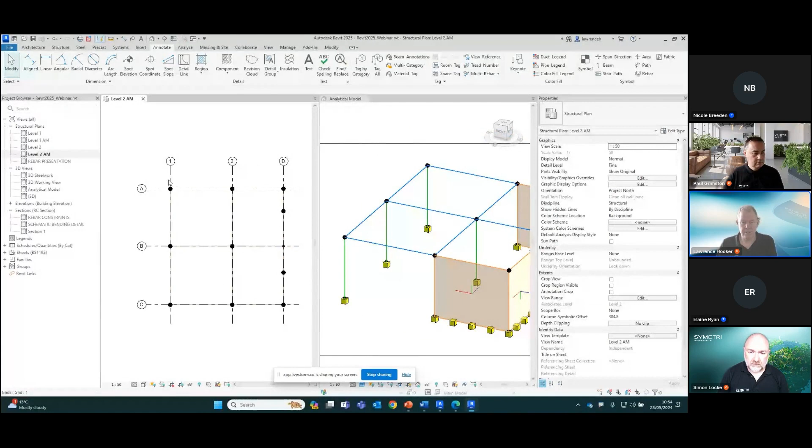Now, let's say that I wanted to now move grid 1. So if I just drag this over here, for example, instantly you can see the analytical model flex on the other side over here. So that's working by ensuring that these analytical nodes have a new control here that's set called Moves With Grids. Okay, so we can control that simply by checking or unchecking that checkbox, Moves With Grids.

Now, what's particularly useful with this new type of workflow here is if I go to the Analyze tab and I now want to construct some new members in here, if I click on Member, obviously here I've got Start and Endpoint Definition. We've got a new interface tool up here for 3D snapping, so I'm going to enable that. And let's say that I just want to produce a couple of bars across here, so we'll do that.

Okay. And now, if I select this node over here, we can see that we have a normalized curve parameter. So I can set segment lengths in here, or if I want these at thirds, I can type in my normalized parameter over there. So in this case, this will be 0.66 over there. This one will be 0.333 in there. And straight away now, you can see we've got that updated method.

Now, if I do a very similar thing over here, so this will be 0.66, and this one in here will be 0.33. Right, so you can now see we have that arrangement. So if I now select grid A and I decide to move grid A, okay, over here, you can see now in this case, these nodes weren't actually controlled via that model.

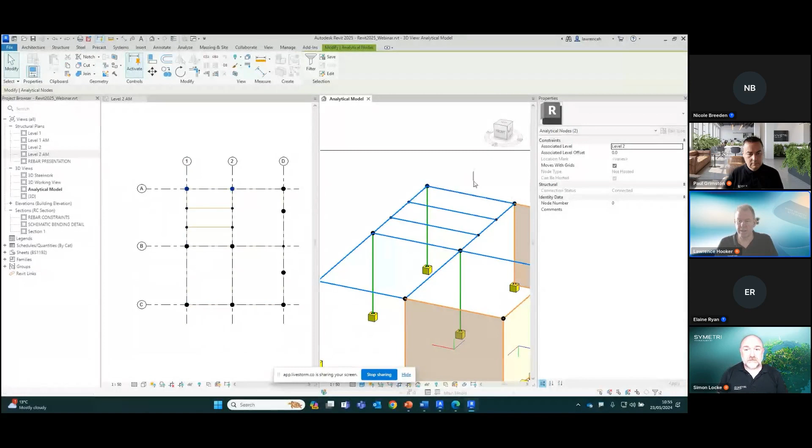But of course, I can then select all of the nodes or the relevant nodes that I want to actually have updating in here. And we can then ensure that those move with grids, and then those bars would flex because obviously they're not set out to a dimension, but that parameter, which is very useful.

So the formulas that we need for those code combinations are going to be automated and driven by local Eurocodes or country codes or worldwide codes that we might want to use.

The method of building out standalone analytical models is going to grow and get more features, so we can have better, more robust modeling tools to actually develop that analytical model. What we're also doing here is looking to have integration with analysis directly inside Revit, so we don't have to export to Robot. We can do a lot of our workflows directly within the Revit platform.

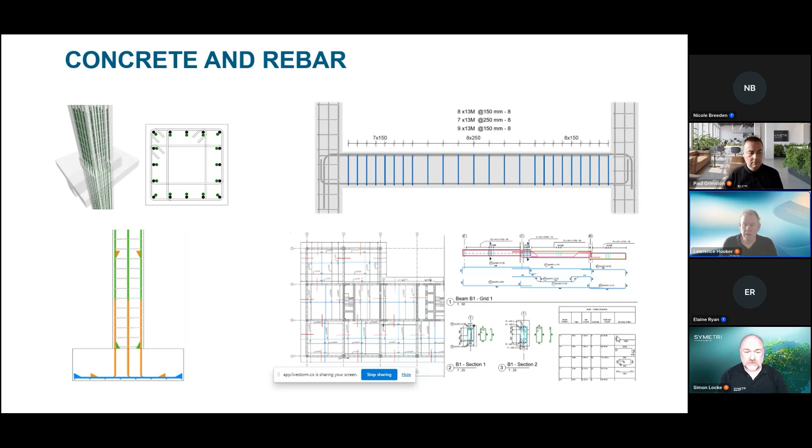Looking into the steel and fabrication workflows, many of you might know that Advance Steel is now in retirement mode. So that's kind of going to stagnate now, if you like. It's going to have its existing functionality frozen, so it will still be a product, but it won't have any new functionality. The end goal here is to have all of these functions and features directly within Revit.